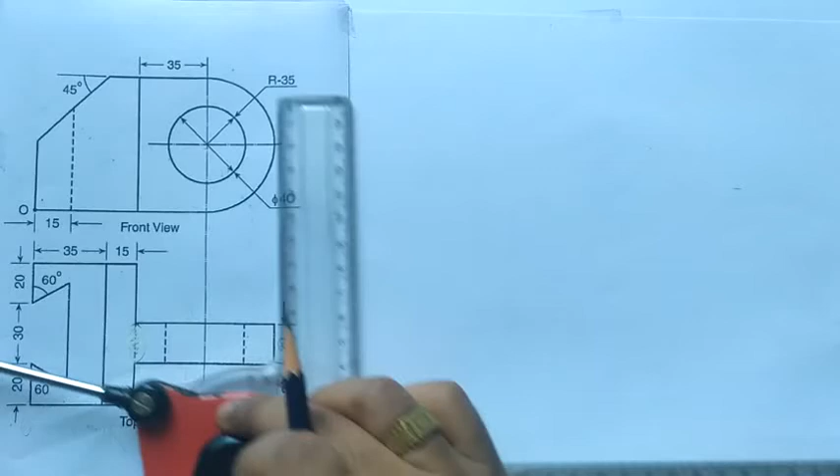Okay, now we need to complete isometric projection for this component. So let's start with the ground line. So here it is. This one is the ground line. Now if I consider here the origin, then...

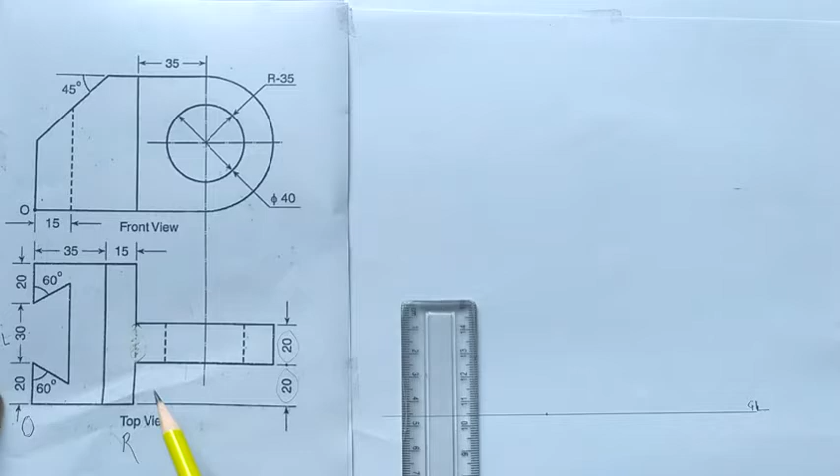What I have to draw, I will write it over here. This one is of origin. Now this should be the right side and this should be the left side. So on the right side I have to draw this much distance length, which is nothing but 35 plus 15, equal to 50 mm.

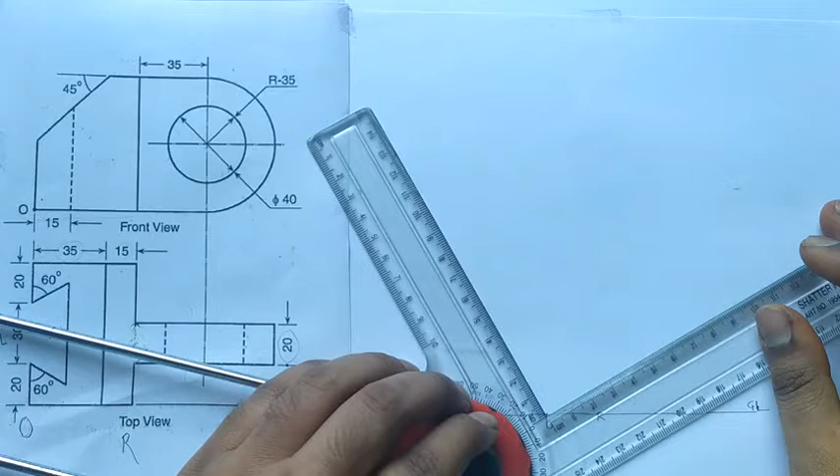So align drafter to the right side, 30 degree. Okay, and on that we have to take 50 mm length. This one is the total length, which is of 50 mm.

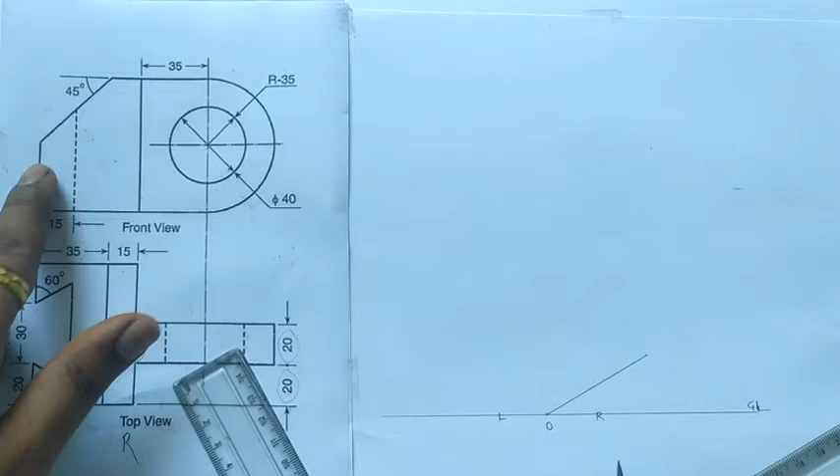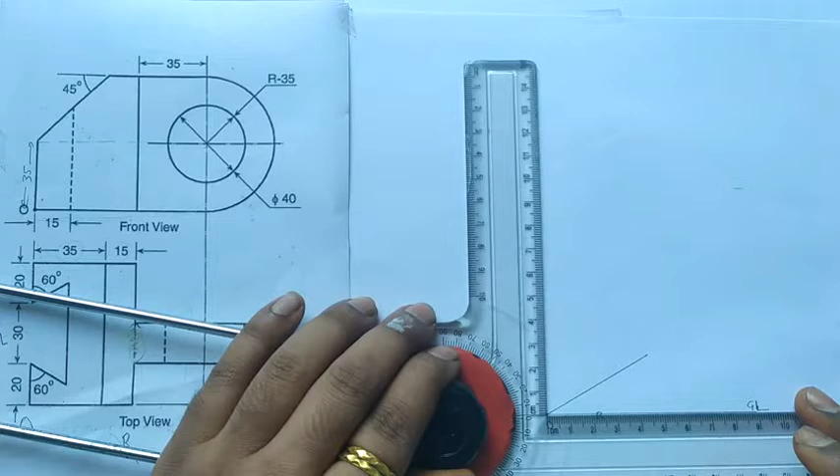Right, now what about the height? From O, this much amount is the total height, right? So this height probably it should be 35 mm. See here, if I extend this line geometrically, it will meet over here. So let's consider it as 35 mm, right? So height is of 35 mm. Let's take it 35 mm.

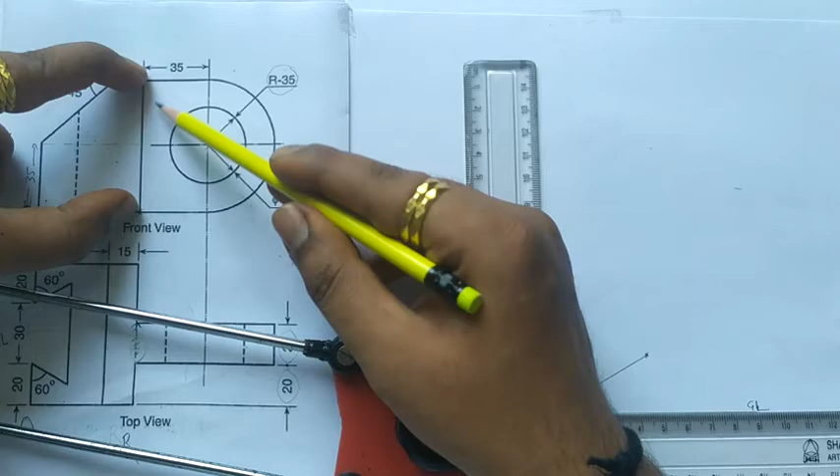Now at this location, here it is, this location is here. Now at this location the total height is, see here, the radius, outer radius is of 35, that means the diameter is of 70 mm. So from here I have to take 70 mm distance. Yes, it is 70 mm.

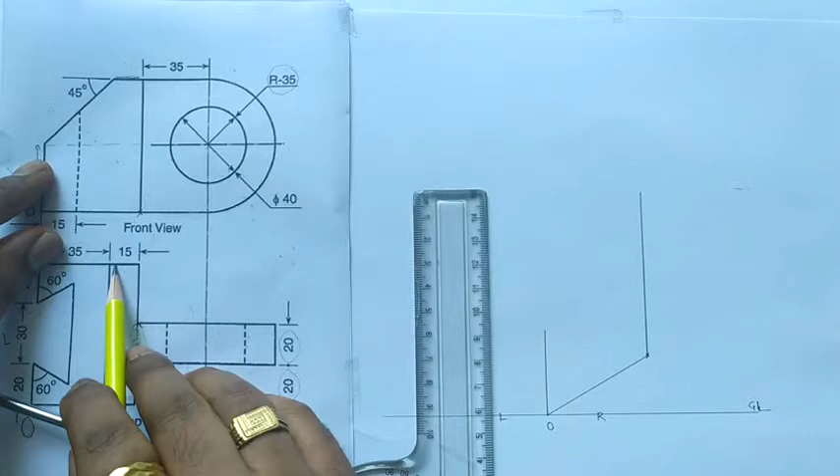Now see here, this much distance is of 15 mm, right? So what I have to do, since this 15 mm is parallel to the right side, I will form here 15 mm parallel to the right side. Now simply you need to connect it.

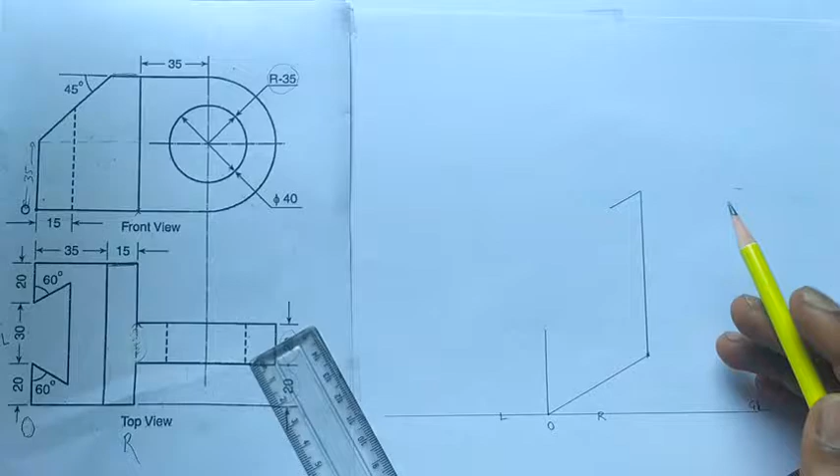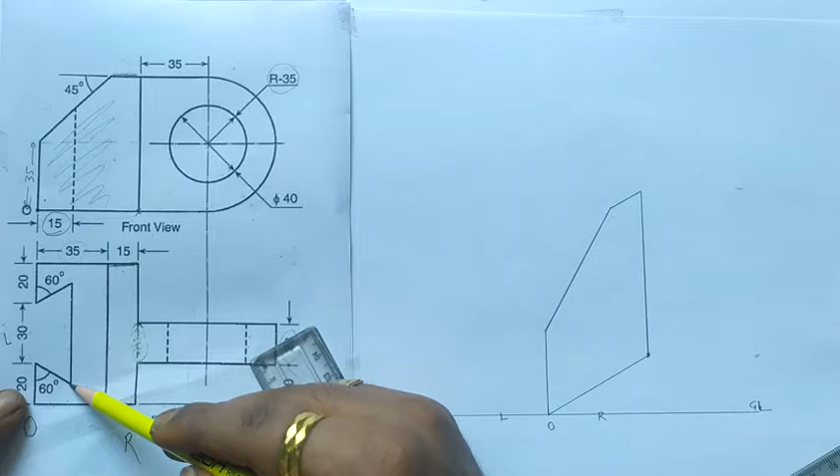Now what we form? We form this portion, right? Now next thing, see here, at 15 mm there is a dotted line which is for this one. So if I extend these lines, it will appear over here. So let's take 15 mm distance.

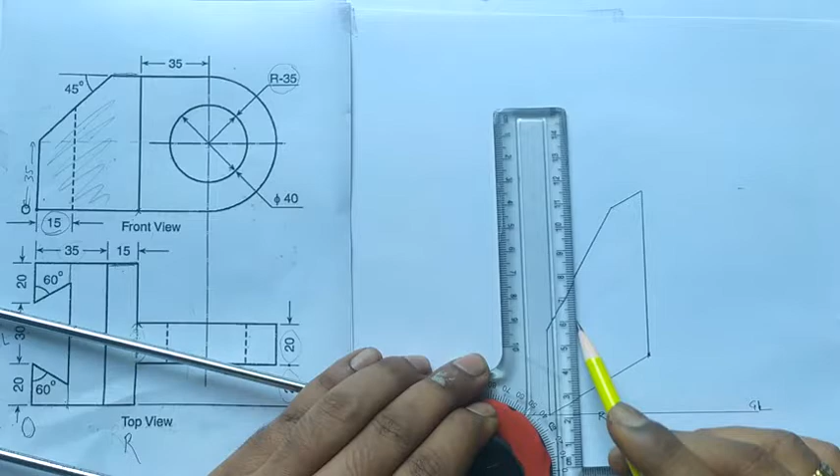So after getting 15 mm distance, I will align drafter to the zero line or ground line, and I will mark over here. So this is the point, this one.

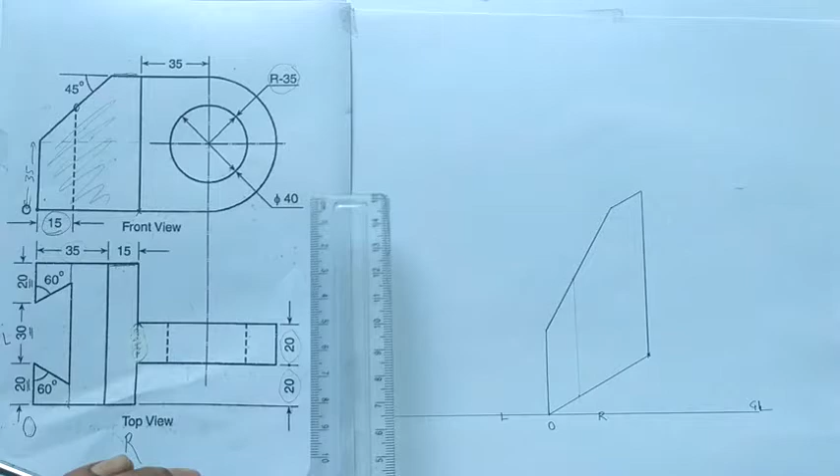Now each and every point on this line or on this edge, we need to extend at how much distance? 20 plus 30 plus 20, so it will come as 70 mm. So at the right side, sorry, at the left side, make the 30 degree inclination and take 70 mm distance.

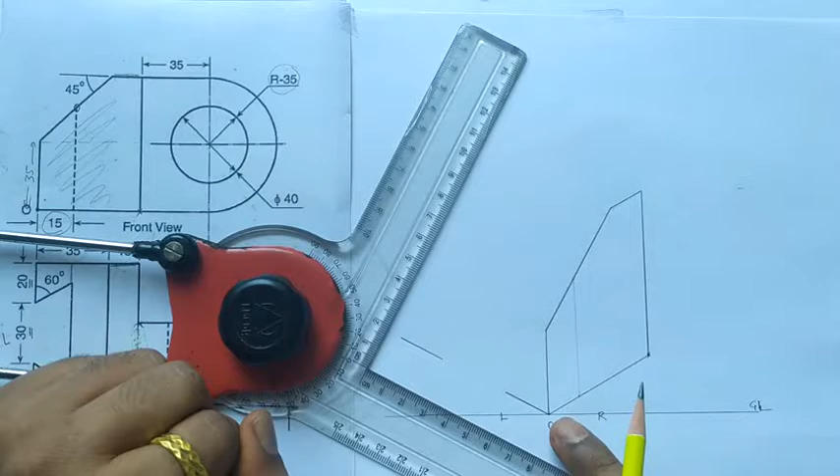So out of this 70 mm, 20 mm is of solid line, and here it is 20 mm is of solid line, right? Now the height, which is 35 mm, for both these four corners, this one.

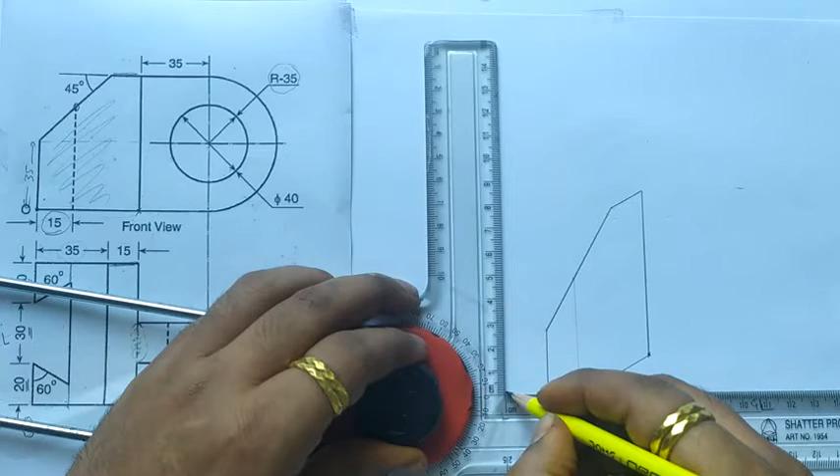Again this one and this one. So I will take the height, align drafter to the ground line and mark here 35 mm. Similarly at this point 35 mm. Similarly at this point 35 mm, right.

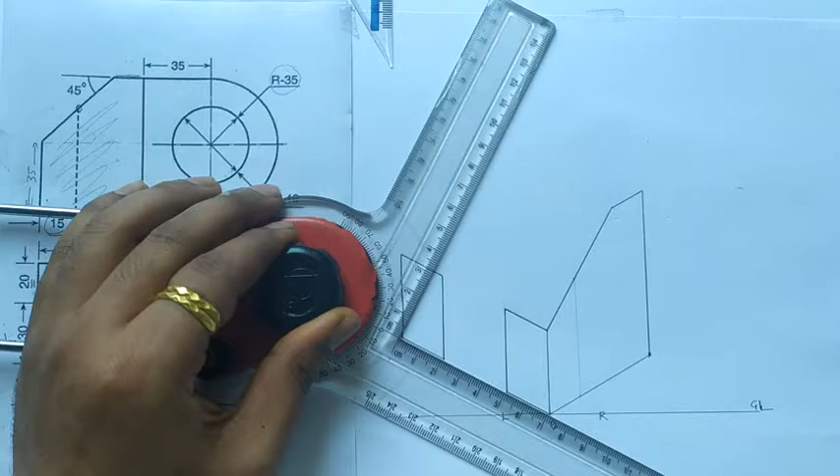So I will connect it, connect these points. Now either you can shift this point 70 mm towards left side. So align drafter to 30-degree angle and now take 70 mm length. Right, this one is of 70 mm.

Similarly, at this point, 70 mm, right. Now we need to connect it.

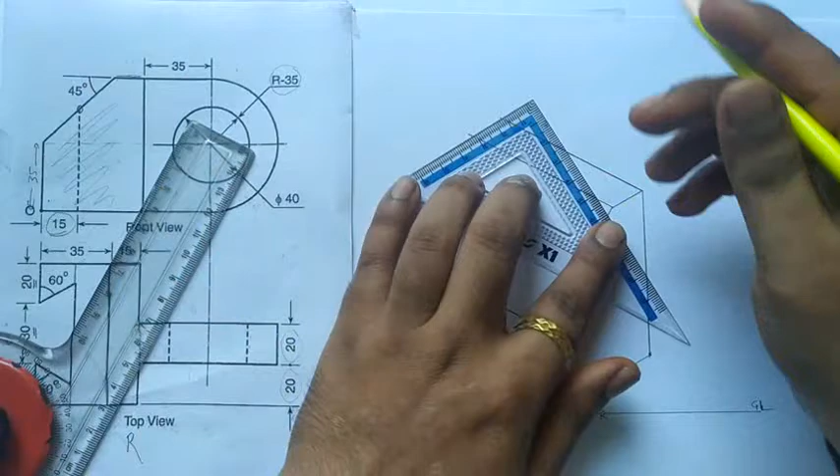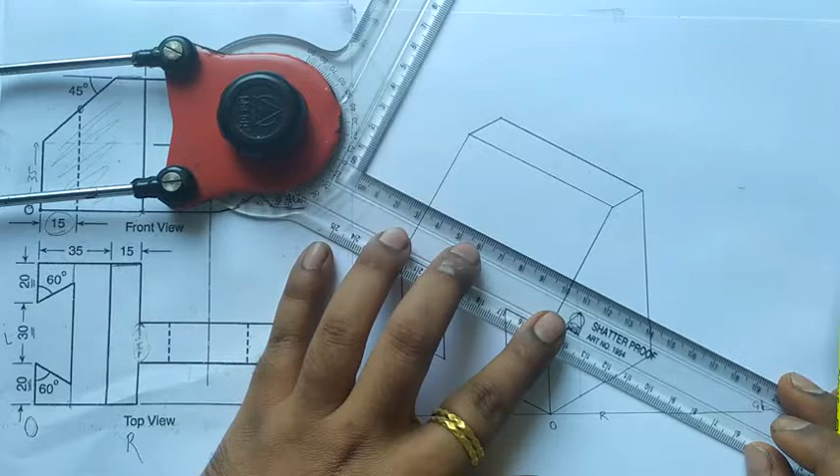Okay, now what about this? So for that, I need to draw over here or extend this point, simply extend this point, right? So to clarify, we don't know this much distance, but we know the angle, right? So we have to construct this separately.

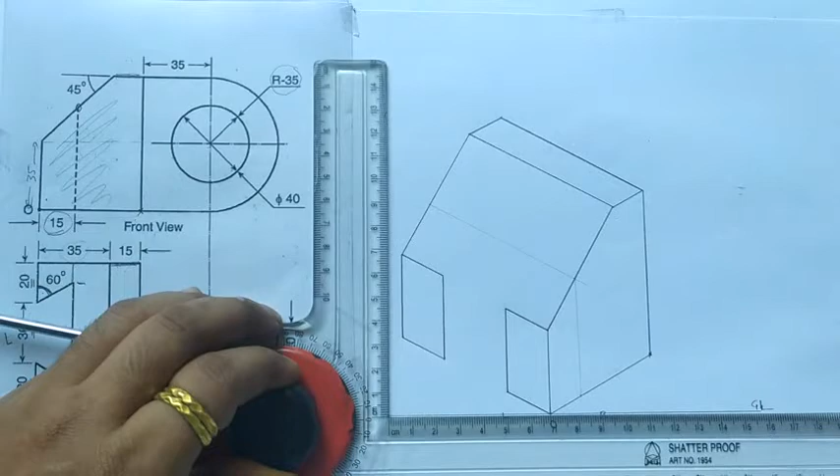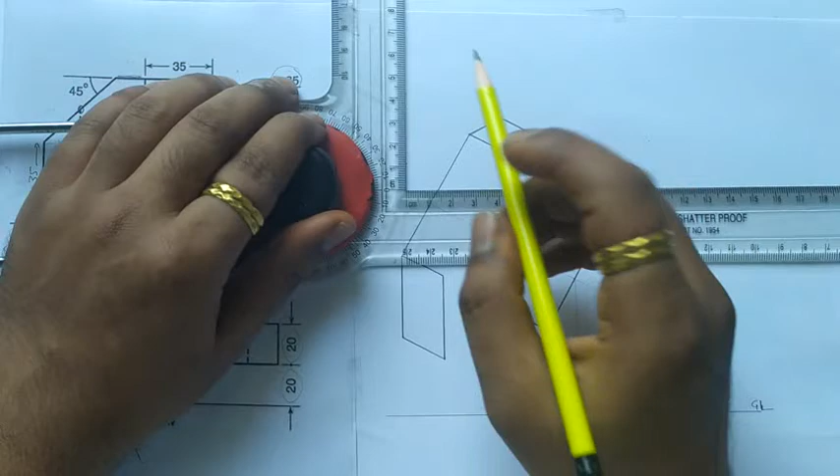So I will draw over here. Since the distance between these two lines is of 15 mm, I will construct this part only separately to get a clear idea. So here it is, take the 15 mm distance, and after 15 mm draw one more parallel line.

Take the middle distance, is of 30 mm. See why I have taken here 30 mm - it is 30 mm distance because this blank portion is of 30 mm, right? So take this distance 30 mm and then mark 60-degree angle.

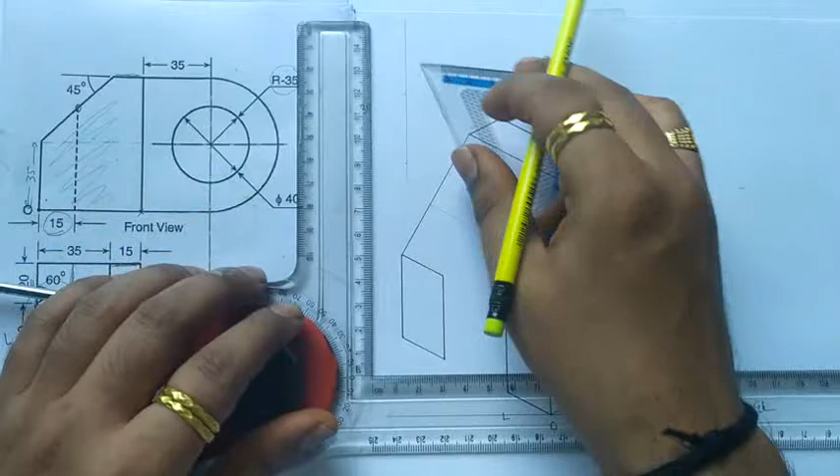So you know, I am using this one. Since this angle is of 60 degree, I will mark over here. And in the same way, on the other side, 60 mm, 60 degree angle.

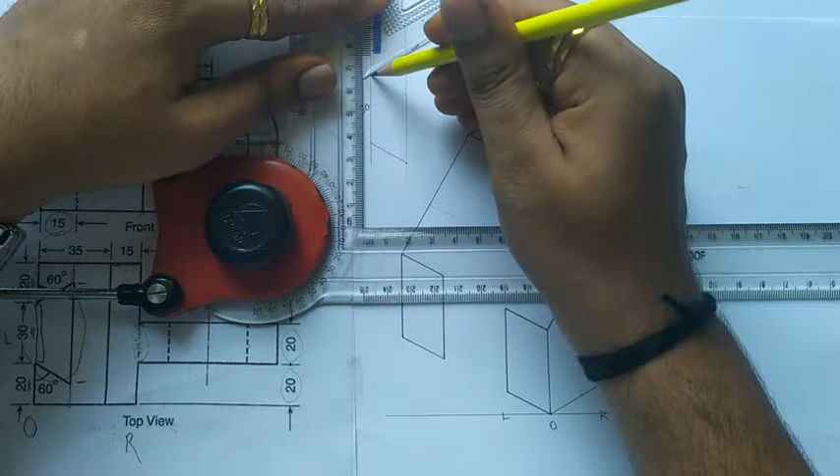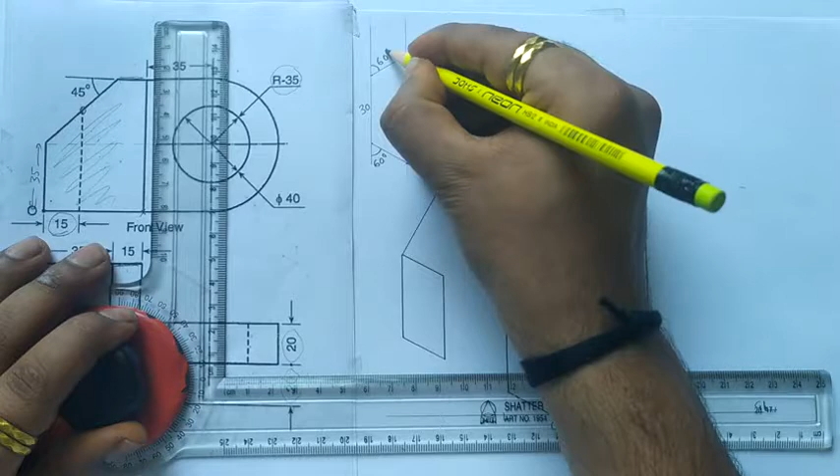Now, simply what I have to do, I need to find the distance between these two locations. It is of 48 mm, right? From this point to this point, if I take this as a 60 degree and this as a 60 degree, then this much distance, when the gap is of 15 mm, then this much distance is of 48. That means this distance is of 48.

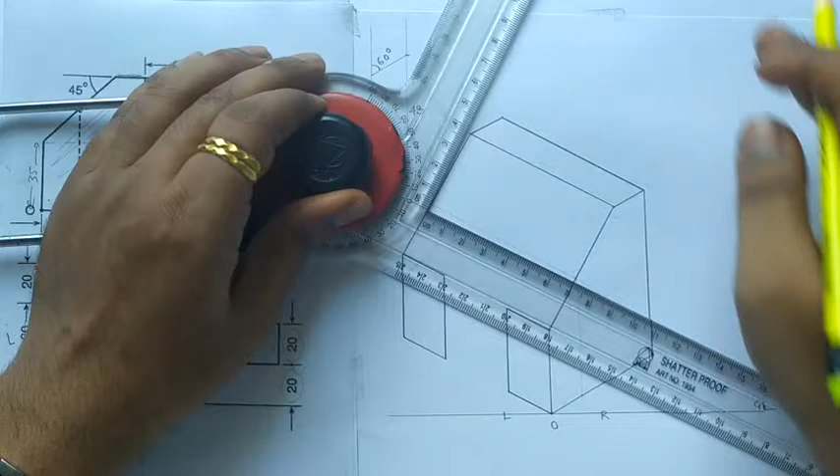On this line, find the midpoint. Since it is 70 mm, take the midpoint and mark 24 mm on one side and 24 mm on the other side.

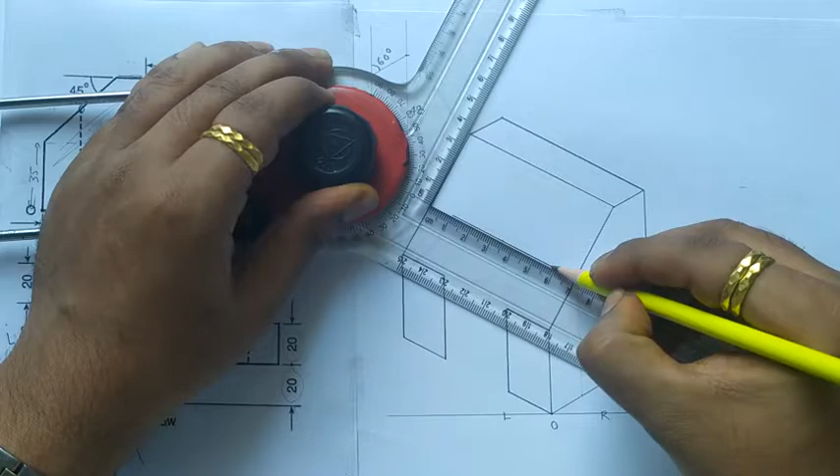Simply you need to connect it. I have to connect the upper part to this line, and this upper part to the upper corner.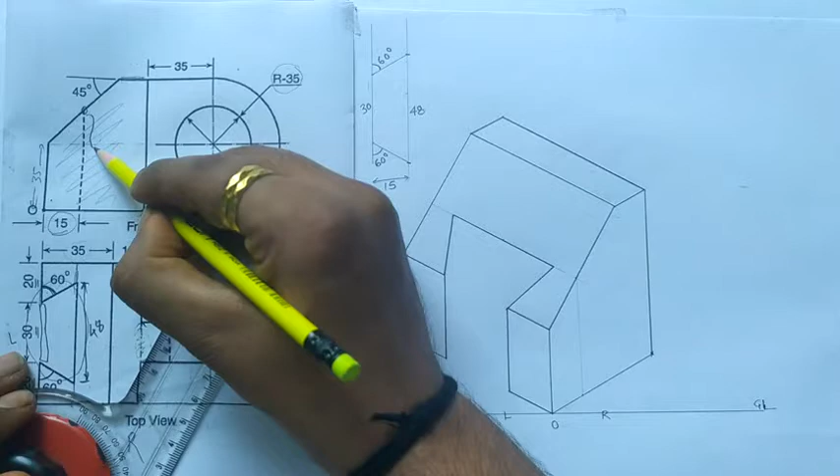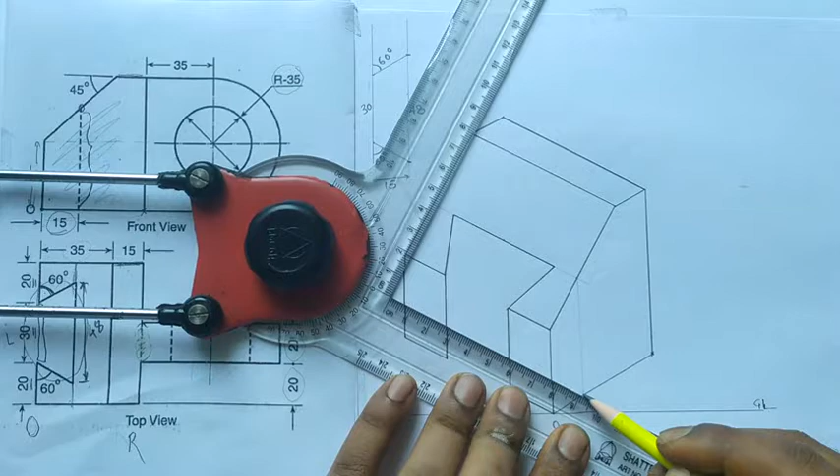This edge is of this much amount of length, so I need to measure this, or simply make a 30-degree inclination and draw the inside edge. With the help of this point, I can draw the inside edge, so this one represents the inside edge.

Now I need to draw a vertical line from this point, up to this faint line. Simply I have extended this portion. Now, the next part, you need to connect this remaining portion. Now it is completed.

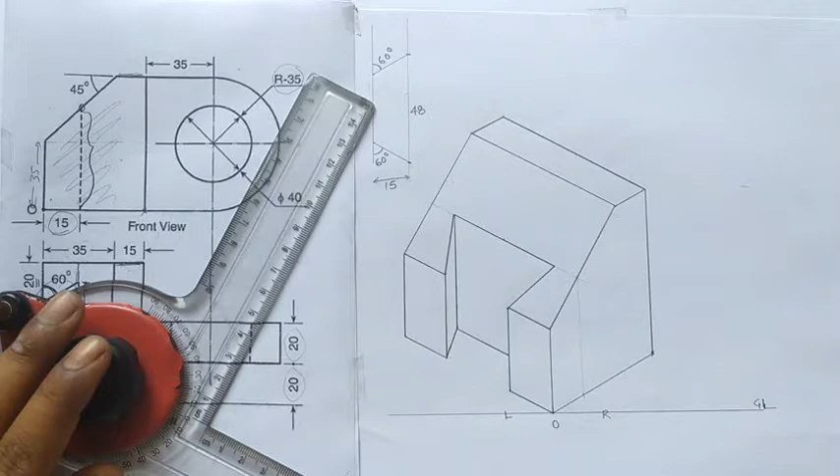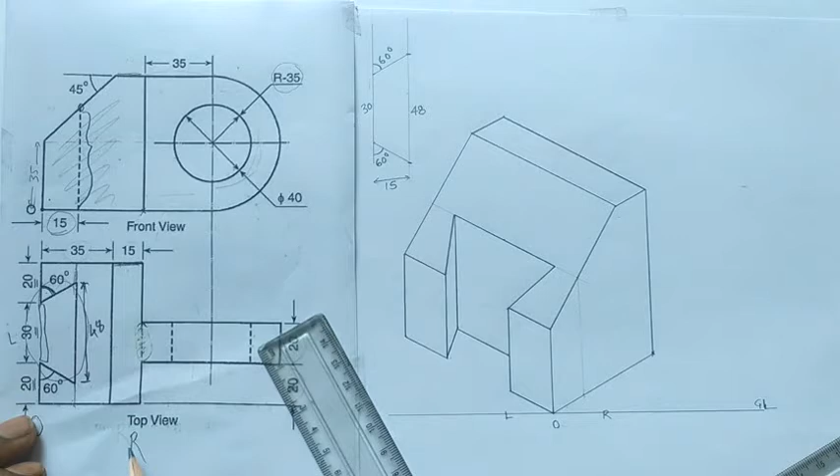Now the next part is much more interesting. See carefully, the next part is of a half circle along with some extruded part. So I need to draw this extruded part. This 35 mm is extruded in the R direction, so this will be the R direction.

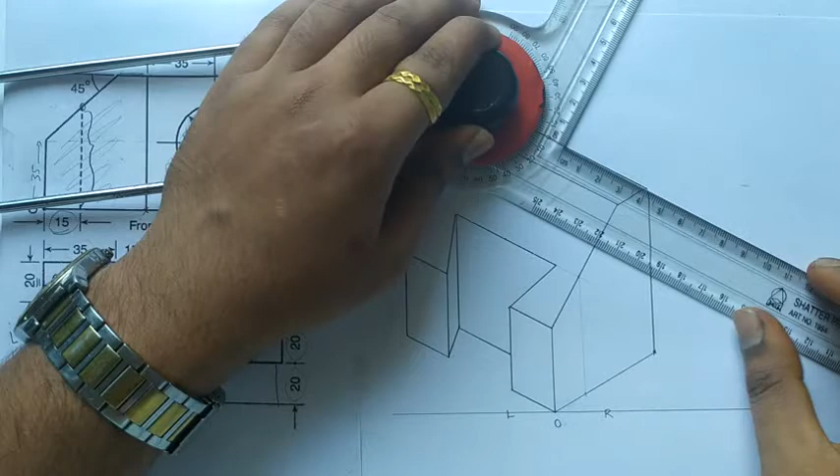Now it is given 20 mm. This much distance is 20 mm, and the 20 mm extruded portion is there. So take here the distance as 20 mm, here it is 20 mm, and one more 20 mm.

Now I need to extend this 35 mm only. So I will extend this, 35 mm, so here it is 35 mm.

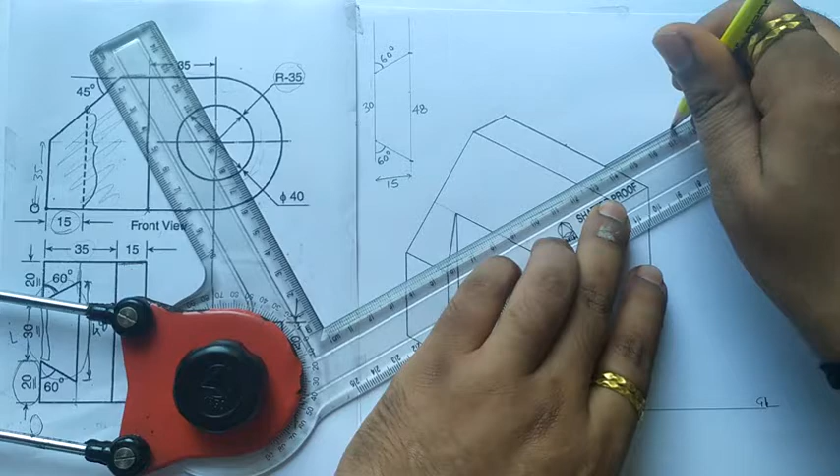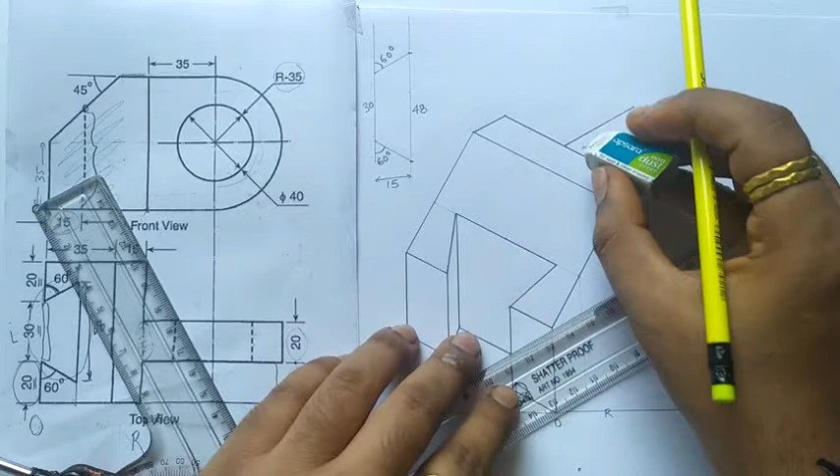Now again, one more time 35 mm. So that much amount is extruded, and since this portion is at the same level as that portion, there is no separation line between these two.

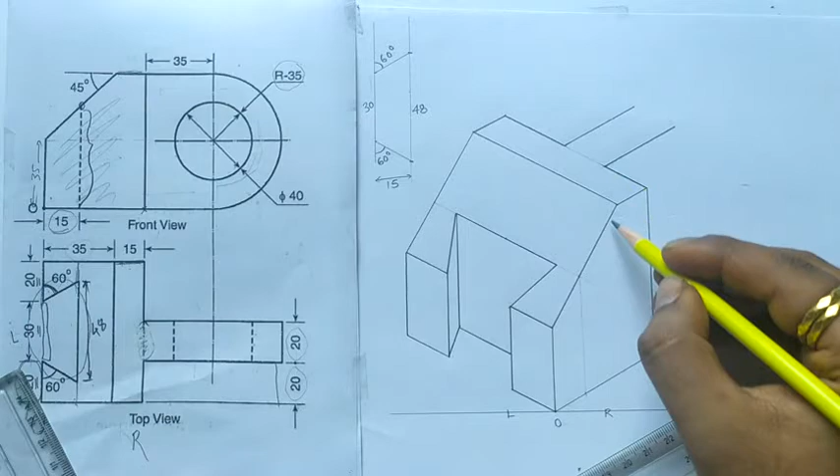Now the total height is 70 mm, as you know. So if this will be the starting point for this projection, then 70 mm below that there will be one more line. So I will take here a perpendicular of 70 mm, and from that point I need to draw one parallel line.

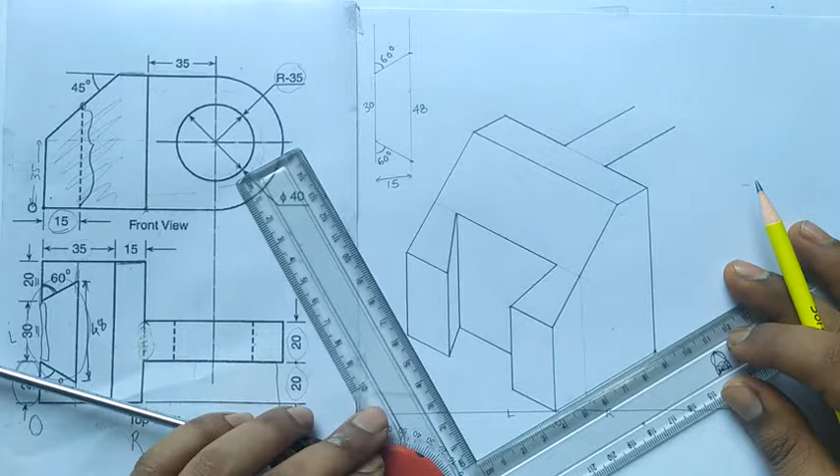To the R side, which is 35 mm from this point, or you may continue with this one. There are number of ways. So what I will do is project this point 70 mm below: 1, 2, 3, 4, 5, 6, 7 below.

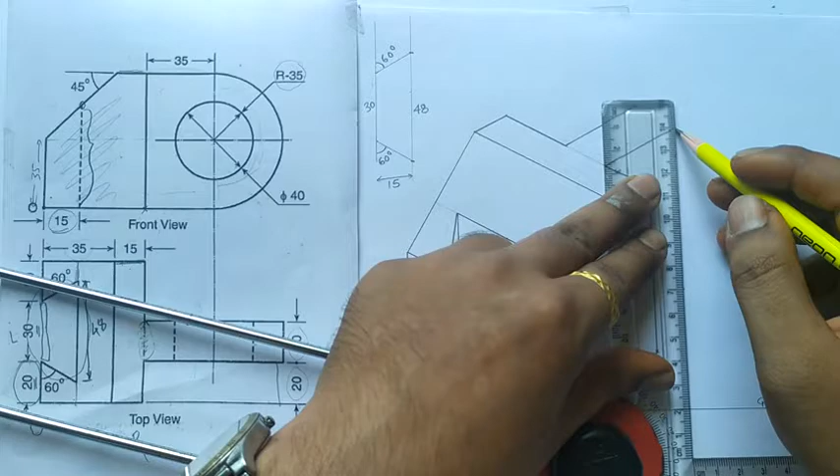Now since I got the end point, simply what I have to do is project this point backward in the direction of R. So if I find this point and then draw lines from here to here, then it's fine.

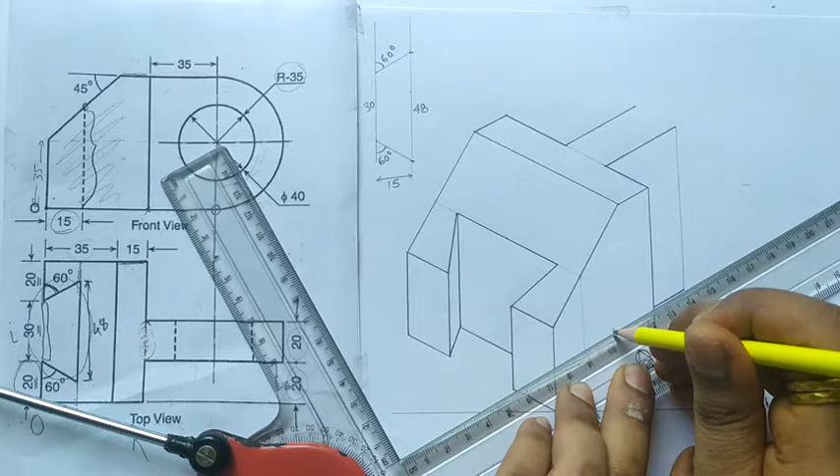If I draw a vertical line of 70 mm and go back in the same direction of R, then that is also fine. So this is the point where the 35 ends.

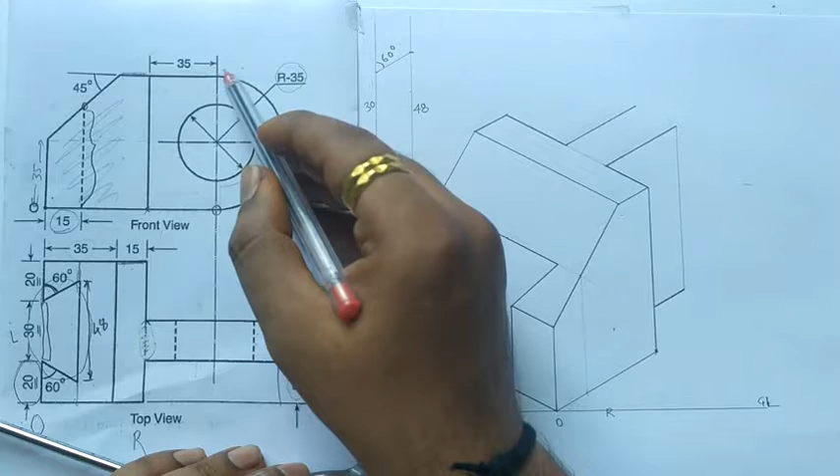Next part I will draw with some colorful pens so you will understand. Now see here, for this half circle I need to generate one square which is 70 by 70, because the radius is 35, meaning the diameter is 70, and these are the midpoints.

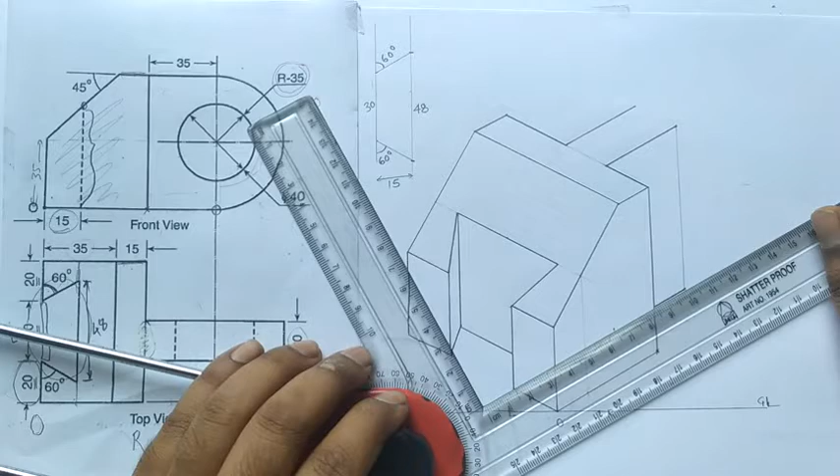So already I got here one point at 35 mm. This will be the first point, corner 1, 2, 3, 35. This will be the other corner.

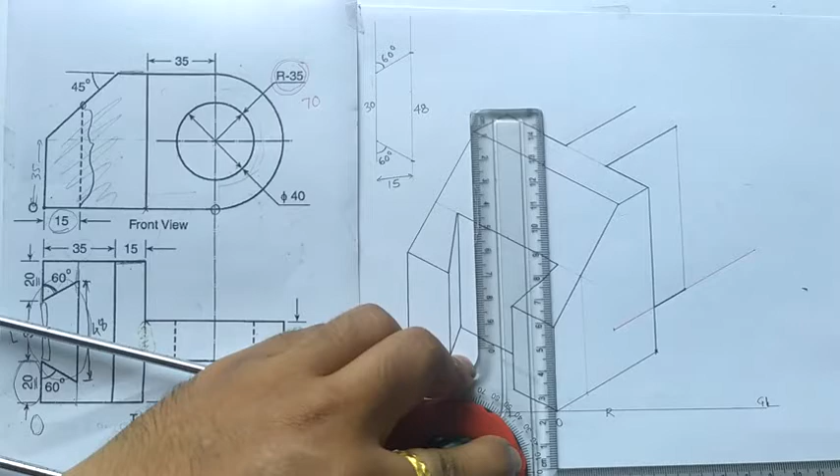In the similar way, draw a perpendicular from these points 70 mm above, and from here also 70 mm above. Because of the color pen, you will get a clear idea about what I am doing over here.

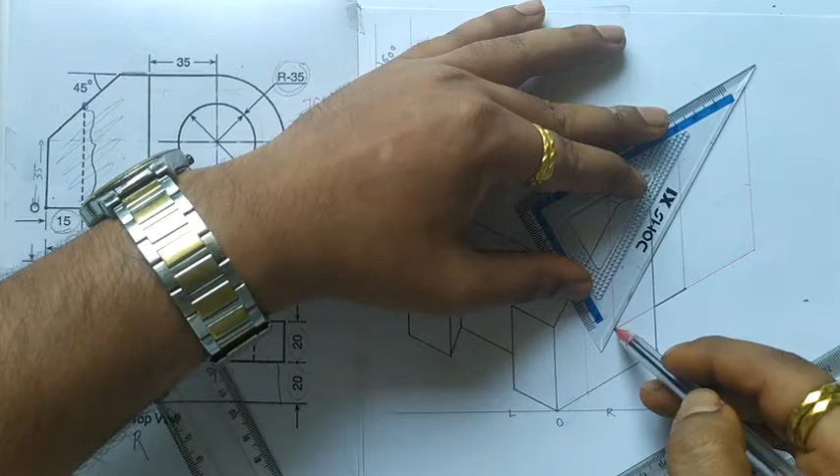Now after constructing this, what we have to do is connect the longest diagonal. So this should be the longest diagonal, and I will connect it.

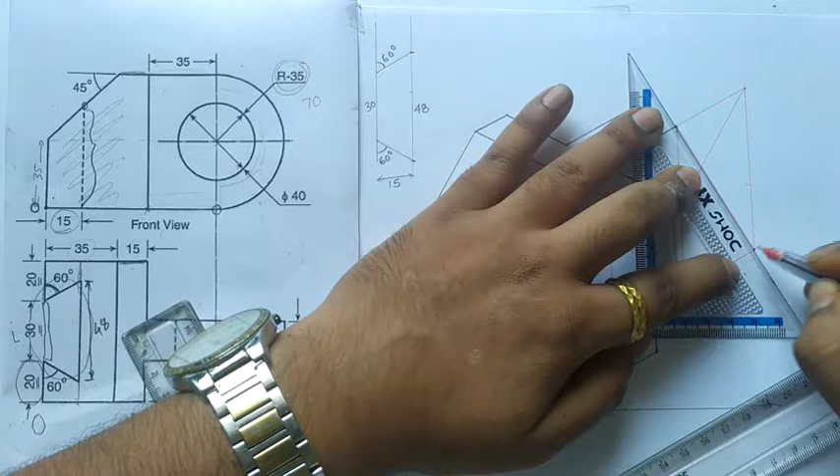Since we have formed two triangles, from one triangle we take a corner, and in the other triangle we need to connect the midpoint of the side, like this. In the similar way, I will find the midpoint of this vertical side at 35 mm. Now what we have to do is connect it.

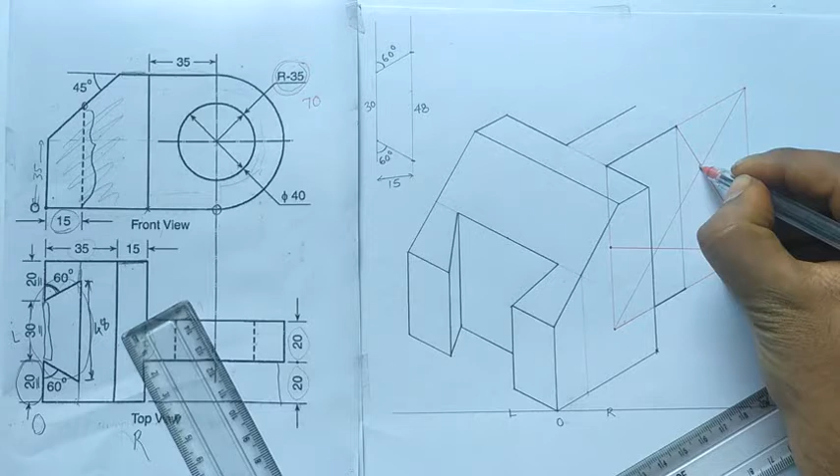By this means, we will get these center points. This is the first one, second, third and fourth. Now see carefully. From this point, take the distance which is equal to this much, and simply draw a half circle which will touch the square at the midpoint of this side, right?

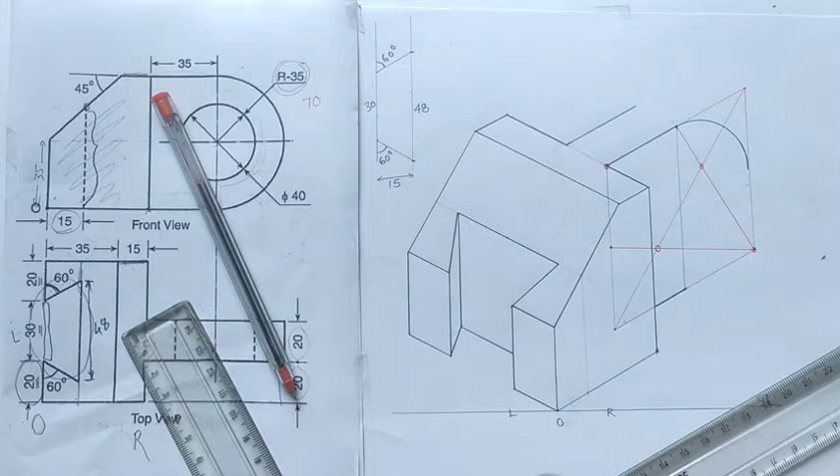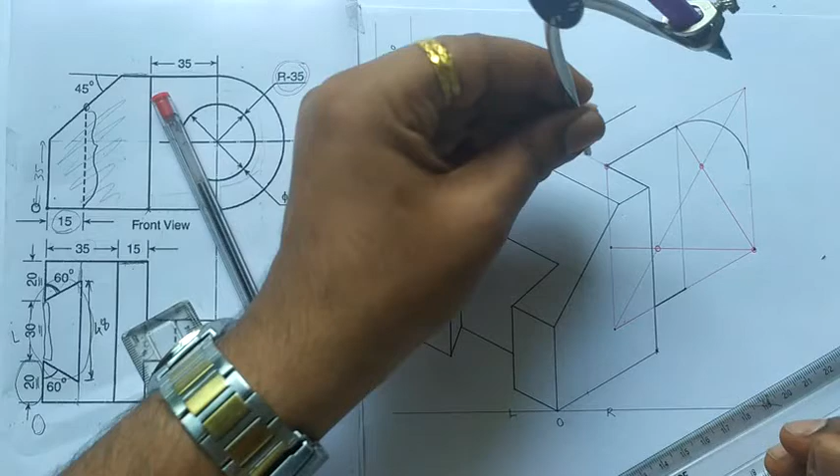Now next part, take this corner as a center, and up to the midpoint as a radius. Is it? Now since this is the half circle, if we want to construct here, then we will use this one, but from this side I need to construct, so this will be the, right.

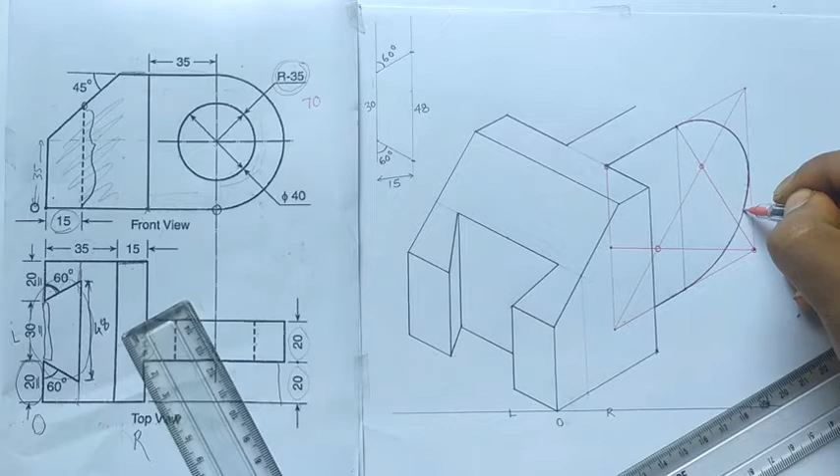So I will construct it with a red line so that you will understand. You have to draw with the compass only. For your understanding purpose only, I am using a pen over here, right? So this should be the outer circle. Okay. I will draw this so it is visible in the red line. Okay.

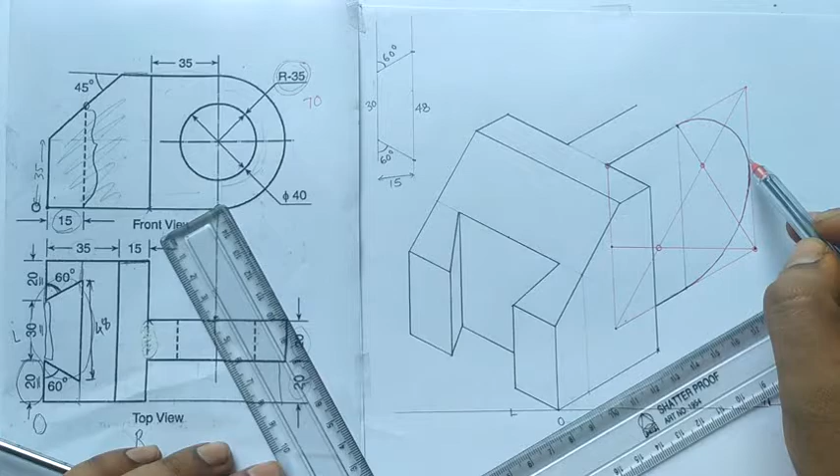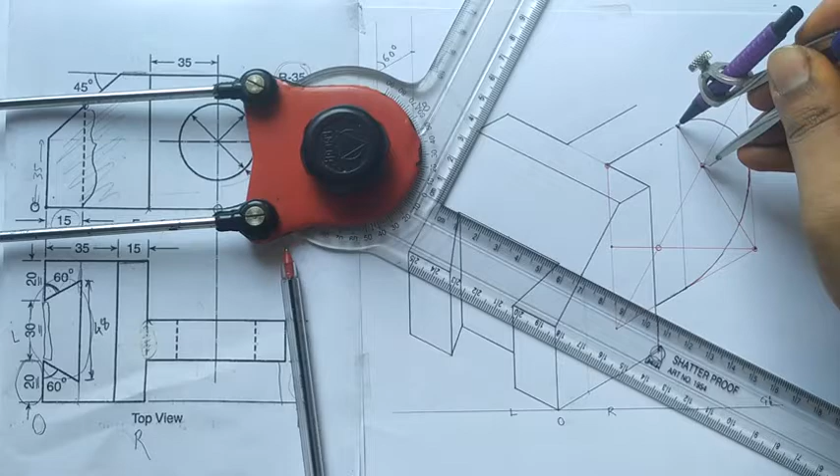Now, since I have constructed this one portion with this as a center point, I simply need to project this point 20 mm, because this thickness is 20 mm. If I project this point, it will appear over here, right? So take the same amount of length, and by considering this, I need to construct one more curve, right? Now we have to draw one tangent to this one.

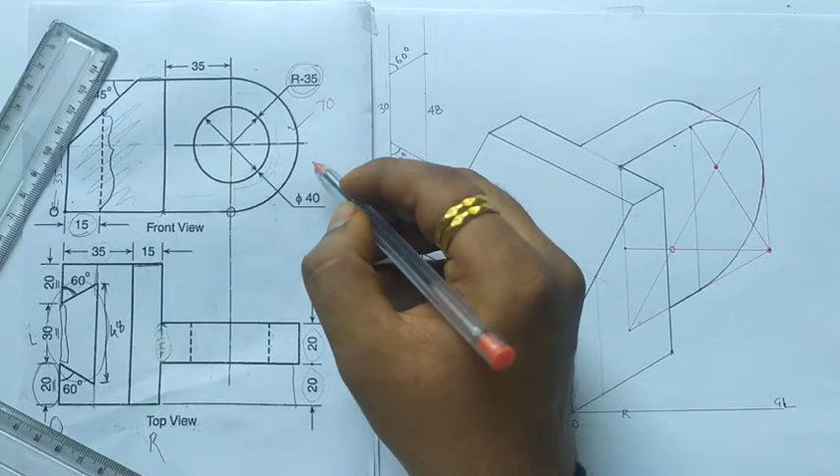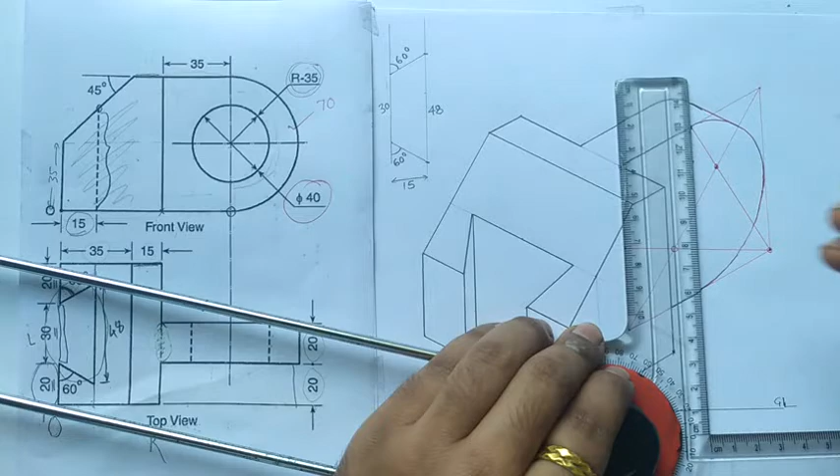See, now it is completed. The outer portion only, this part. Now it's time to draw this one, diameter, which is 40 mm. So for that, we need to consider this as a center line, right? We know the center points. Let me come to this point. 70 mm distance. Now here is the center point. So from center, I have to take 20 mm above and 20 mm below points.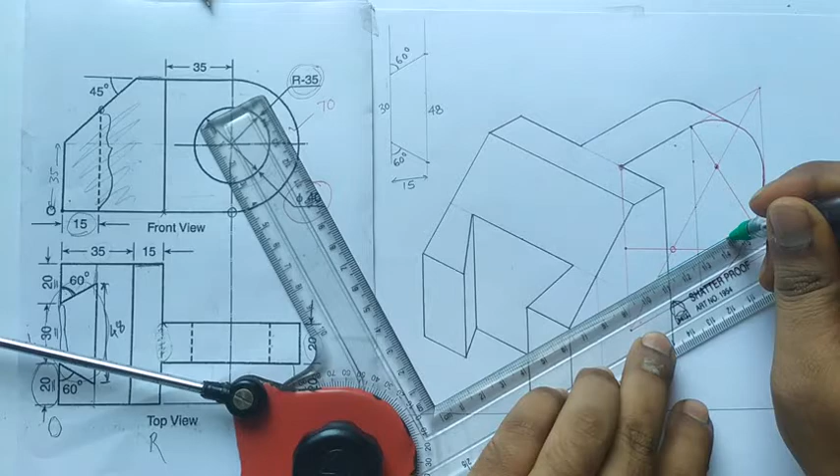So for better understanding, I will use a green pen. Take this much inclination and simply form a square in isometric. Okay. Right? In the same way 20 mm and again 20 mm. Now I have to complete this.

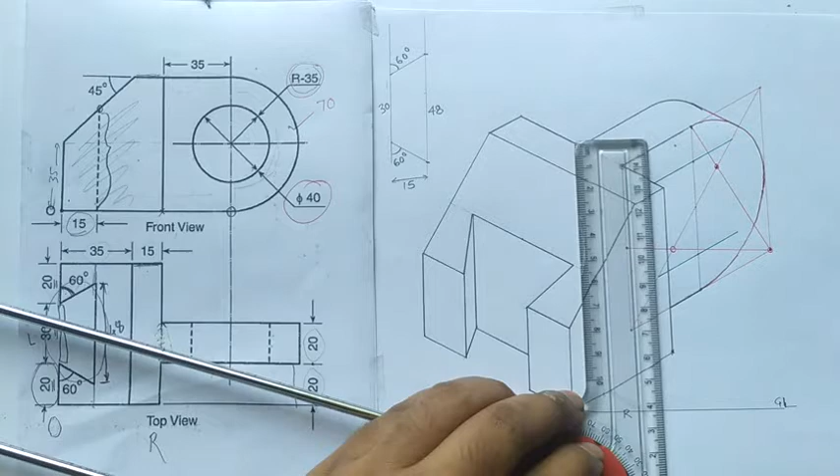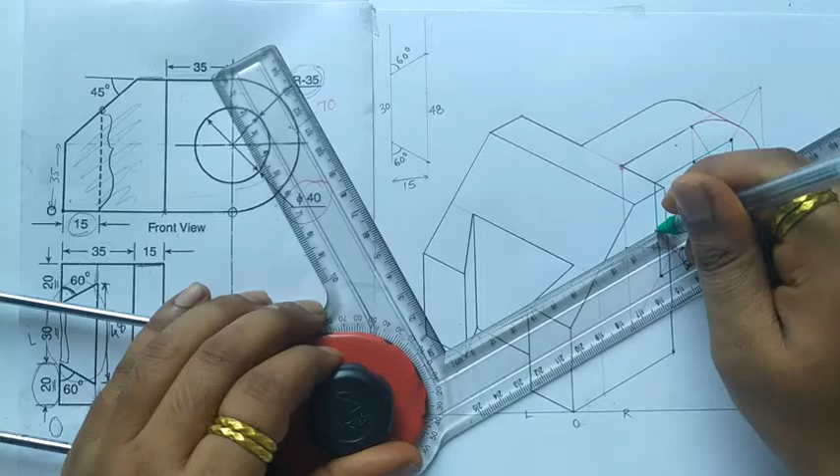See, the inside green square, already the diagonal is there, right? Only we need to connect the midpoints. So here is one midpoint. I need to connect it with this corner, and again I need to find the midpoint over here, which is at this point. Right? Simply connect it. Now you will get here this one crossing point, and this is another crossing point.

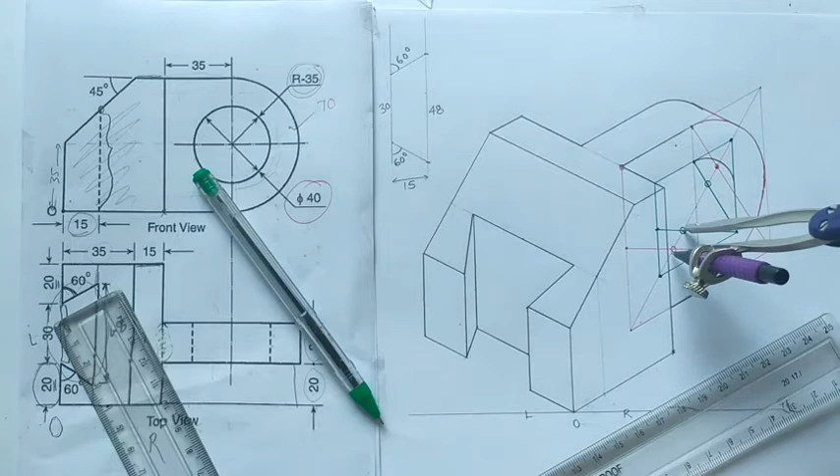We need to take this as a center and with this much distance I need to construct that much amount of circle only. Similarly on the other side, but I will draw this much amount only. Why? Because if I draw, then it will come inside of this edge, right? So I will not draw the complete circle.

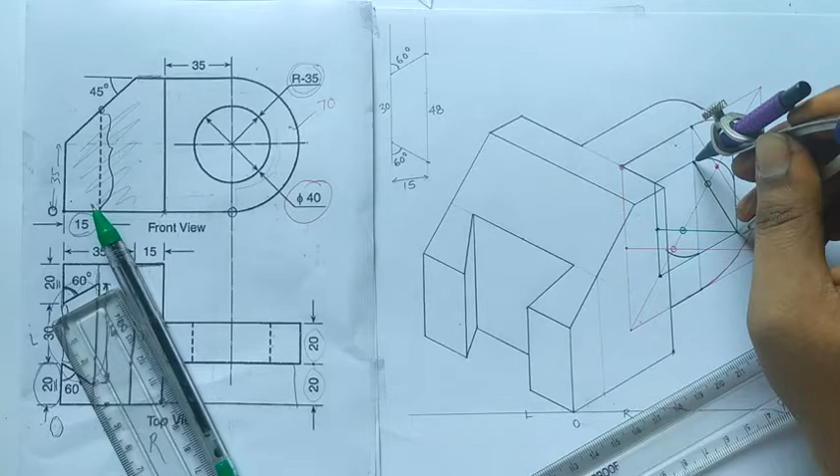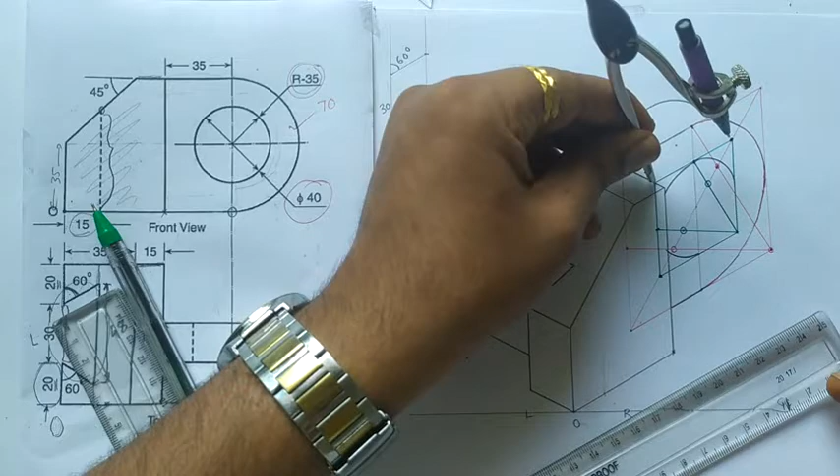Okay. Next one, take this much amount of length and draw the remaining portion. Okay. In the same way, from this point, draw the other one. See, only this much amount of circle is visible.

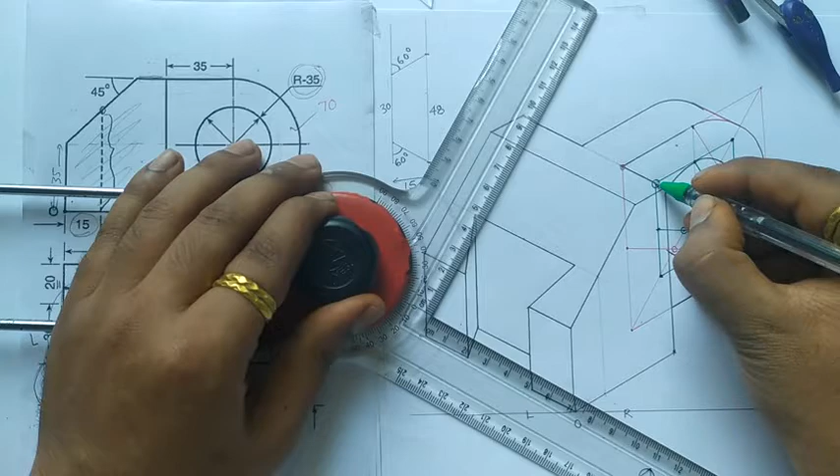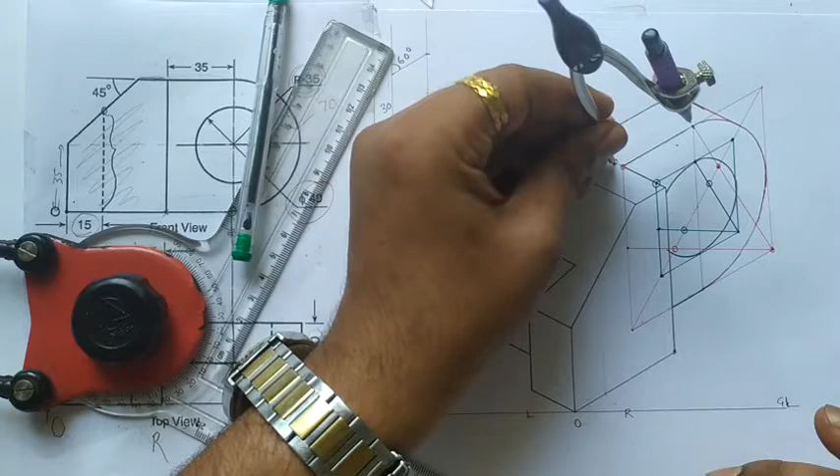Now I need to project, since by using this as a center point I have formed this arc. So project this point 20 mm in the direction of R. If I project this, it will appear over here in R direction. So take this length as it is, and from this point mark the remaining portion. This is visible, right? So it will be completed. Don't confuse yourself, right?

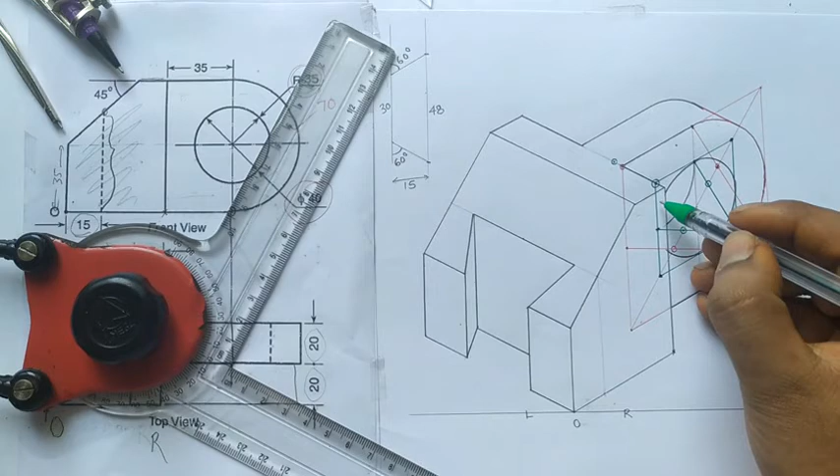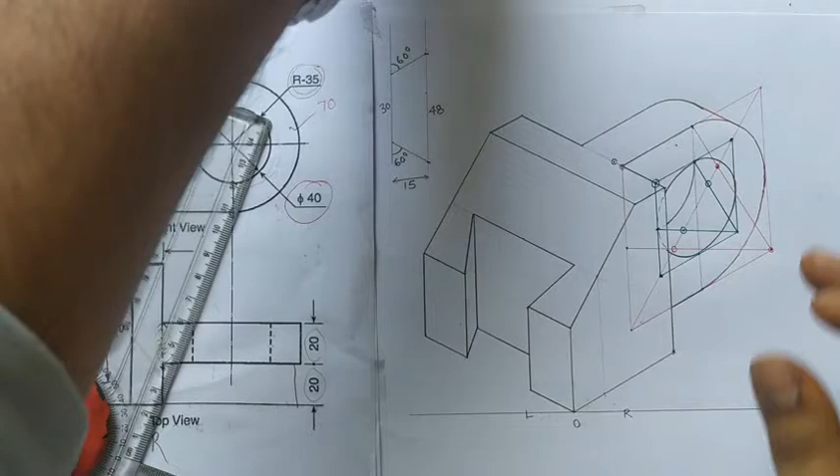This portion is the back side of this one. Because of the hole we are able to see this edge also, right? Simply I have extended this point 20 mm in the L direction, right? So this is the outer circle, and this is the inner circle, which is somewhat not visible. If I draw this, it should be like this, right? It is not visible because this edge is there in front. So I will draw this final one with a black sketch pen so that it will be more convenient.

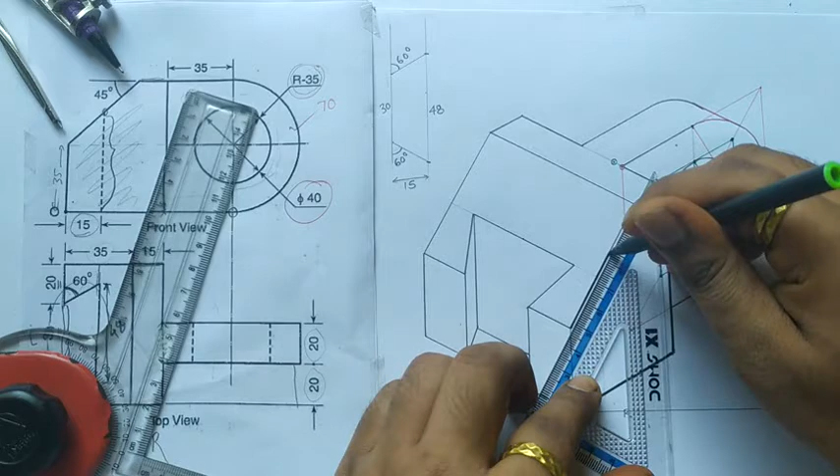See, now you will get clear visibility of the component. Now see, with the help of the sketch pen, it is clearly visible what I am trying to tell you. Okay? So try it out. Make practice of it. Do much more practice.